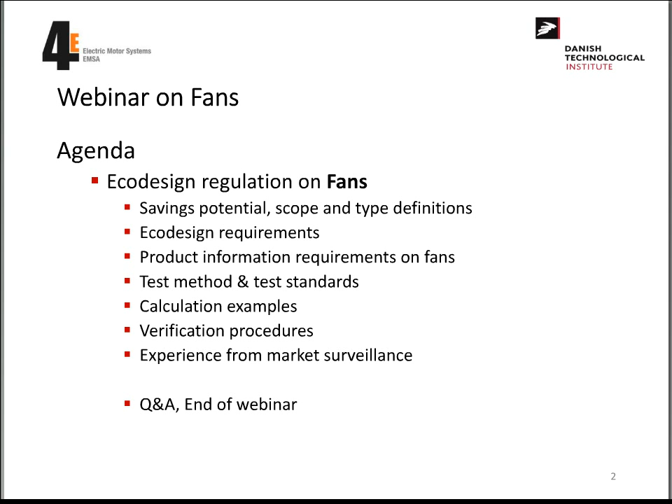First of all, I'll introduce you to the regulation. Some of you might already know a lot, even more than I do, and some of you might need a little update. Afterwards, I'll go through the requirements as they are now and the test method we're using here at DTI. After that, I'll show some calculation examples that could be of big interest for some of you, probably. And in the end, I'll speak shortly about the verification procedures and the market surveillance. And if we have some spare time, I'll show a tool used for optimizing fans and motors that we developed here at DTI.

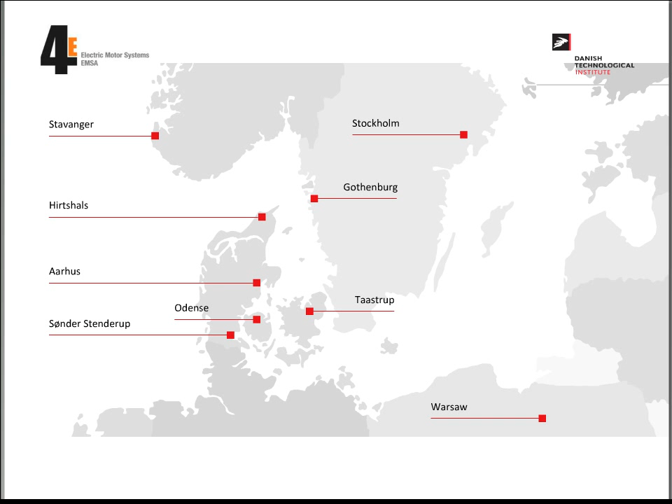As I said before, we are from the Danish Technological Institute. It is a private company, a GTS institute, meaning we are authorized to perform different tests for different authorities. We are around 1,200 employees spread around in Scandinavia, mainly working with research and development activities, and also performance contract activities and commercial projects.

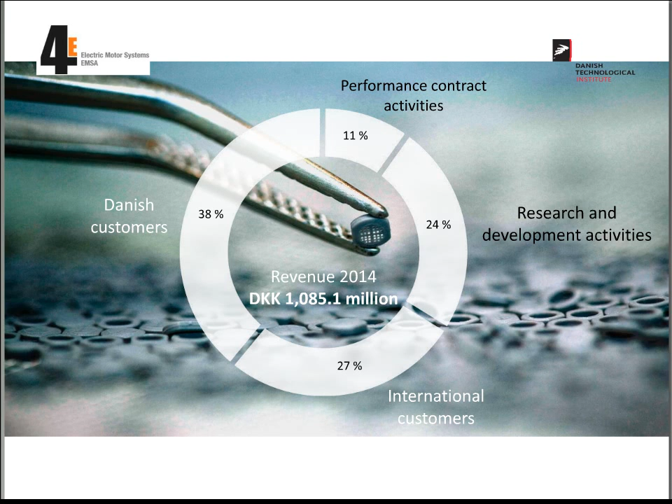Both me and Erik have been working for the European Commission regarding eco-design regulation 327 for fans, but also regarding air handling units. And as I said before, Erik has a few more years on the back, not to say several years.

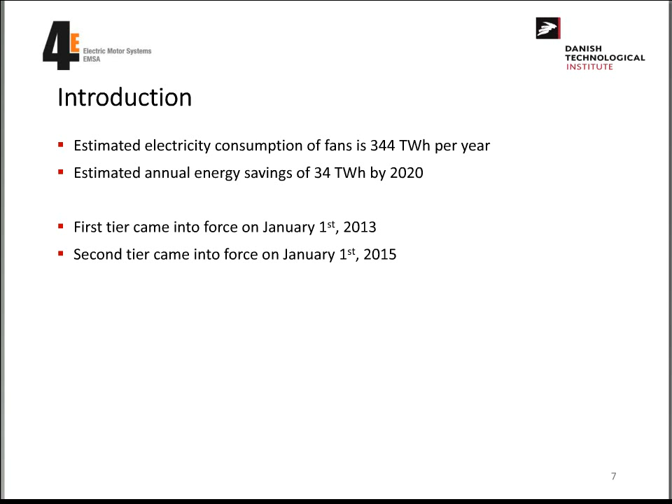I'll mainly be focusing on the second tier. Basically, this regulation includes all fans between 125 watt and 500 kilowatt. The fan has to be equipped or designed to use an electric motor. The regulation does not apply to a lot of fan types used for other purposes. Some of them are shown here, for example, products for emergency use only, laundry and washer dryers with input power below 3 kilowatt, kitchen hoods that are included in another eco-design regulation, and fans with specific operating conditions that could, for example, be in explosive atmospheres or highly toxic environments.

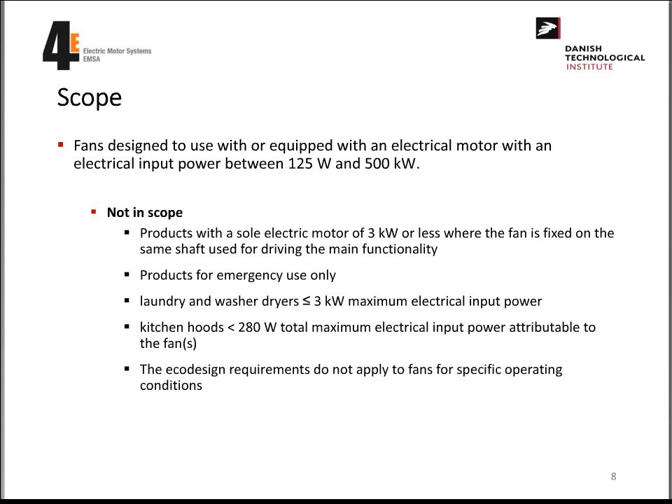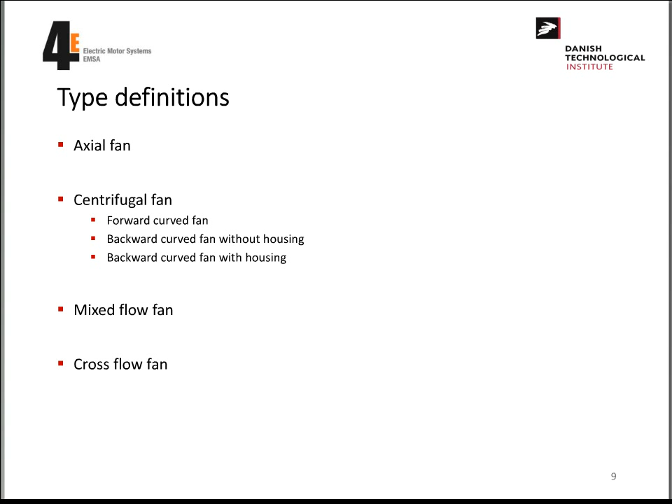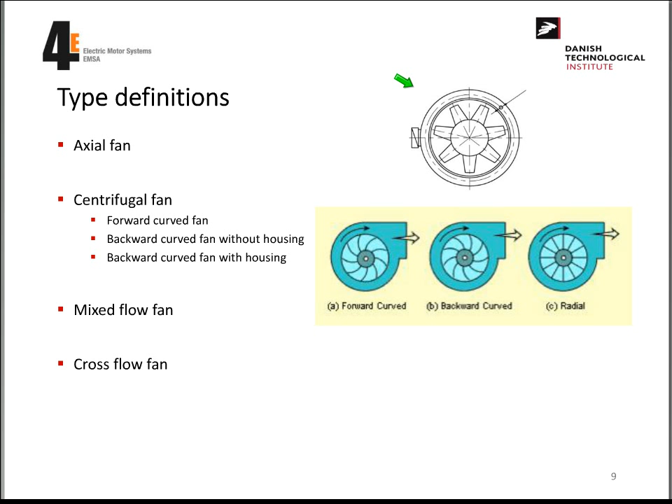The regulation deals with 4 different fan types. The axial fan type is the one shown here. Then there's the centrifugal fan, with 3 different types: the forward curved fan, the backward curved fan with and without housing, and the radial fan. It also includes the mixed flow fan, and the cross flow fan. Okay, I can see we made a mistake, that's also an axial fan. The cross flow fan is usually used in cooling devices. It should have been something else.

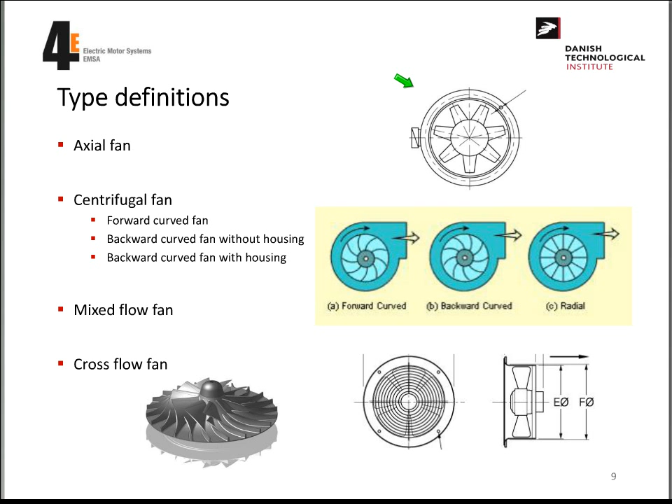This is the eco-design requirements, it will come in a moment. If we take a look a bit closer at this, I'll go through all the parameters shown in the eco-design requirement.

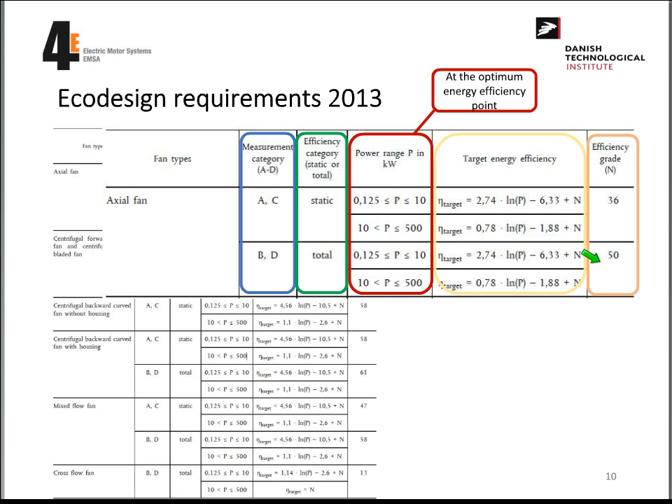And this is for the first tier, 2013. In the second tier, 2015, the efficiency grade changed. So everything else is the same, but the efficiency grade got increased, and I'll show that here. This is from the second year. It's the same as the first year.

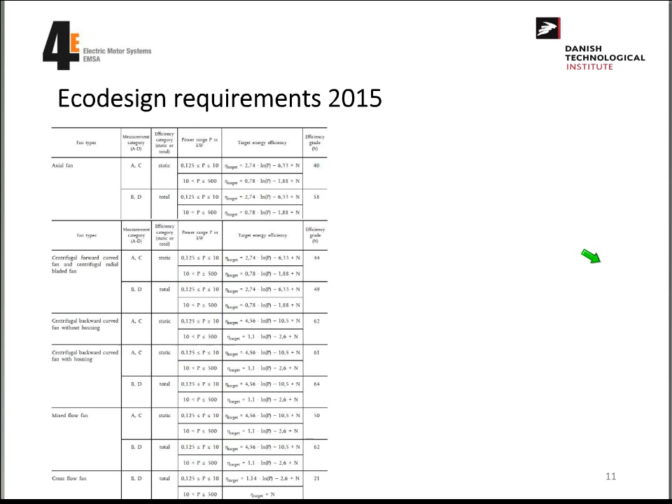If we look a bit closer at the difference between the first tier and the second tier, we can see that, for example, for the axial fan, the efficiency grade increased from 36 to 40. That means 4 percentage points. And that is for the static pressure. If we have a look at the total pressure, we can see it got increased from 50 to 58, meaning 8 percentage points.

And why is this so important? It is important for the manufacturers because they can actually choose whether the fan should be tested according to the static pressure or the total pressure. So if you have a fan that is not performing that well at the total pressure, you could actually change it to the static pressure. It means you'll get reduced requirements.

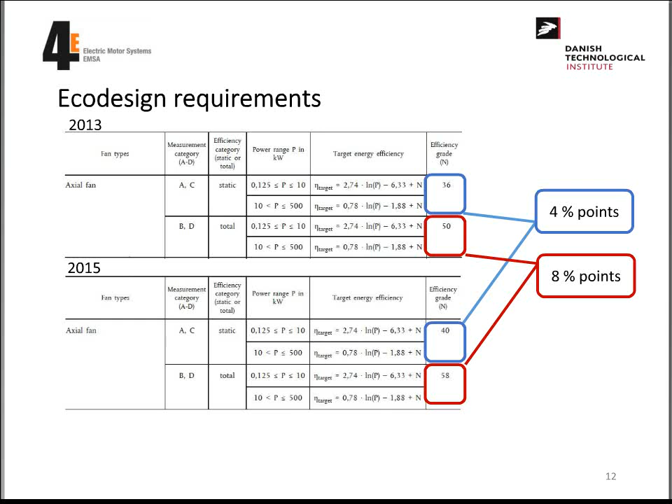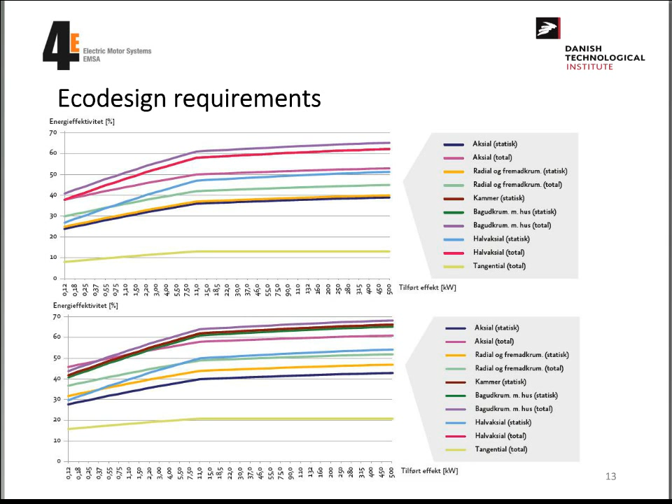The first tier is shown at the top, and the second tier is shown at the bottom. It's more so you have them later on.

It's just important that people have free access to it. This 14-point list, it's not necessary to use the same words, but it has to be shown somewhere.

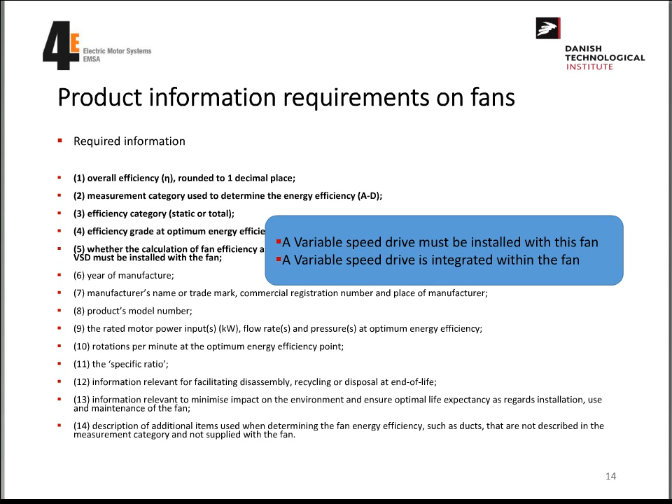If the manufacturers do not fulfill these 14 points, a fan can actually fail during market surveillance because of this. So far, it has not really been done that way. We agreed with the Danish authorities that in the beginning of the first tier, it was okay that the manufacturers didn't fulfill these 14 points - it was only about the efficiency of the fan. But after the second tier came into force, we agreed with the Danish authorities that all these 14 points have to be fulfilled, otherwise it will fail a test.

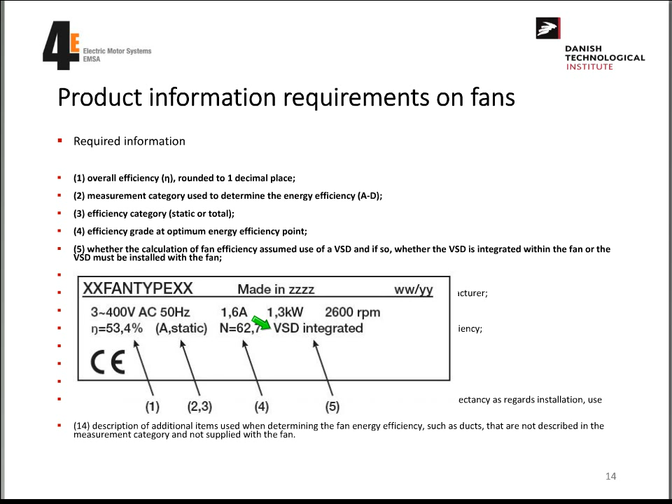Yeah, the test method. The regulation does not really refer to any standards. It's only written that the measurements and calculations must be made using a reliable, accurate, and reproducible method. And here at DTI, we are using the ISO 5801 standard.

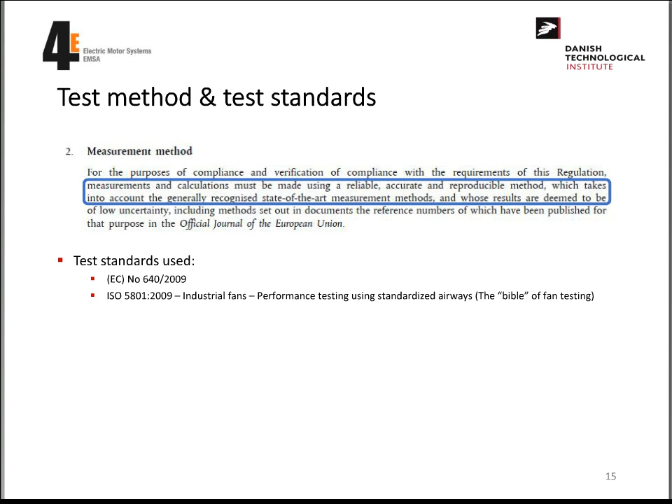If we go a bit closer into how we are testing, the manufacturers have, according to the previously described 14-point list, to provide the rated motor power input, the flow rate, and the pressure at the optimum energy efficiency point. And it's shown by the square and the arrow.

Based on this information, we can plot in the point where the fan has the best efficiency. And to make sure, when we are testing, we are always testing around this point given by the manufacturers, to make sure that we will find the best efficiency point.

Normally, when we are performing a test not according to the regulation, we always make the full curve. It's a bit different in this regulation, where we only have to test in one point. And that can be a problem.

We have also seen that it's a problem sometimes if the manufacturers are giving a point far from what we are testing. Then we will actually not be able to find the optimum energy efficiency point. How we are doing this is that we are changing the pressure, we are changing the flow rate, and

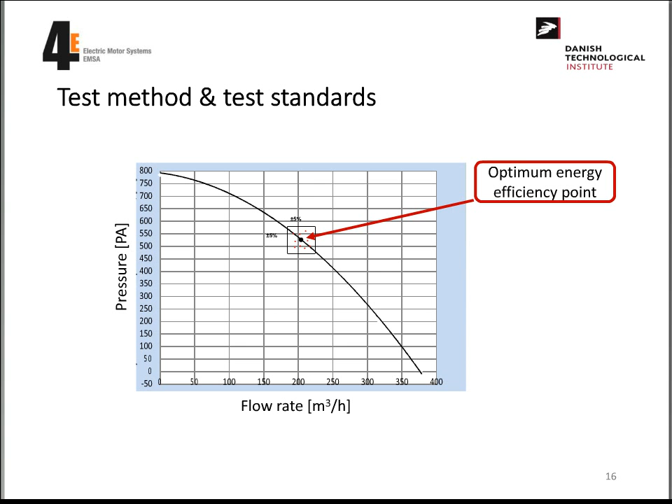hereby we are getting a wave of measurements around the points. The energy efficiency is calculated by this formula shown here. This formula is only used if a variable speed drive is not included. If a variable speed drive is included, we're using another formula where we are adding a part load compensation factor. I'll not go deeper into this because this is something you can definitely read by yourself.

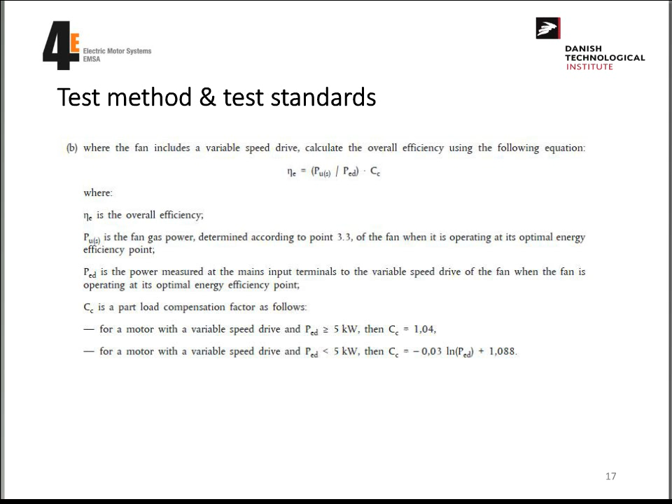What is important is that what we are measuring or what we are writing when measuring. This is an example for a compliance result that passed. I'll just quickly go through.

We measure the efficiency here, based on the efficiency grade that the manufacturer gave us. And the requirement is calculated by the previously shown formula. It's 45.6. And this target efficiency has to be multiplied by a factor 0.9, so it actually gives us a lower requirement for the compliance, and it's shown here, it's the 41. So in this case, the product really performed well and way better than the requirement in the regulation.

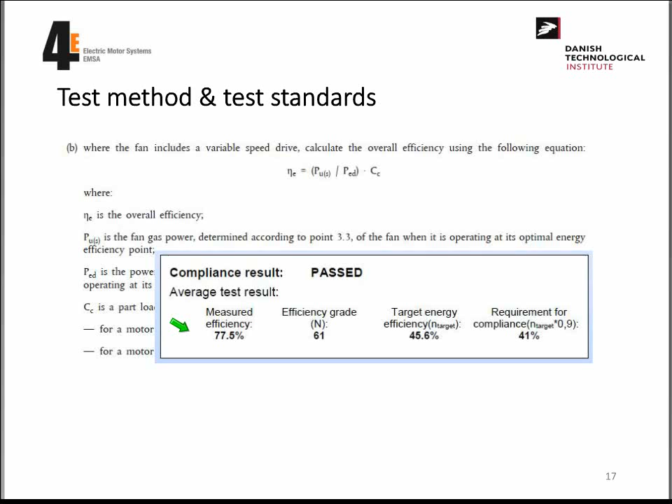The regulation deals with 4 different measurement categories, A, B, C, and D. The A version is a fan with free inlet and outlet. The B is a fan with free inlet and ducted outlet. C is a fan with ducted inlet and free outlet, and D is a fan with duct at the inlet and outlet. I'll show you an example.

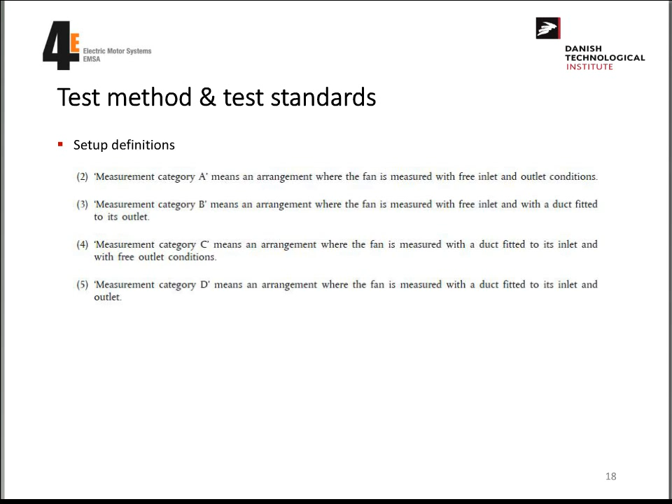This is measurement category A, and the fan is shown by the red square. In this case, because we have to measure the flow, we have to add a box, also called a pressure equalization box, which is attached to one of the sides of the fan. Doesn't matter which one. This box has to fulfill the requirements regarding dimensions, velocity, distributions over the cross-sectional area. Due to these requirements, the pressure inside the box is considered almost as uniform atmospheric pressure. And in this way, we can measure the flow. The box is made according to the standards.

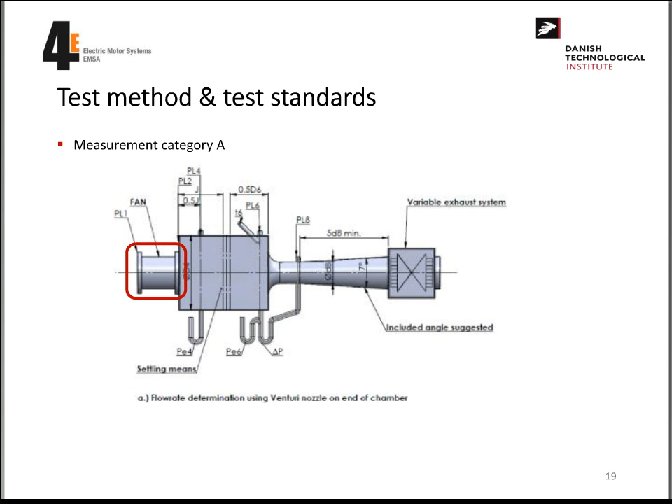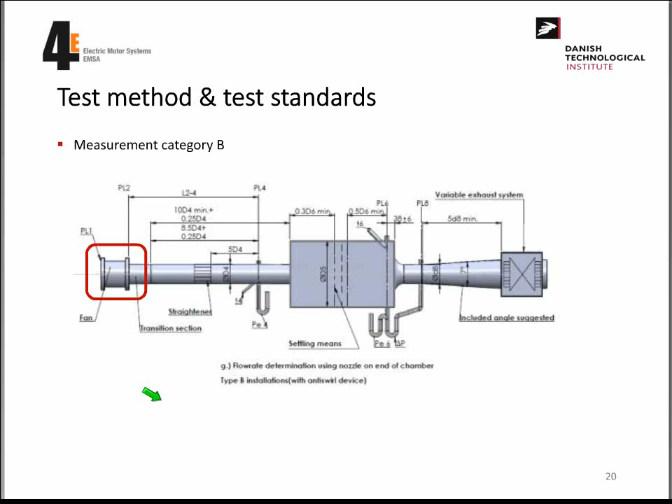Example B, here again you see the fan with a ducted outlet. I'll not go into details for this, it's just so you have an idea what we are talking about with the different categories. This is measurement category C. And this is measurement category D with a ducted inlet and outlet.

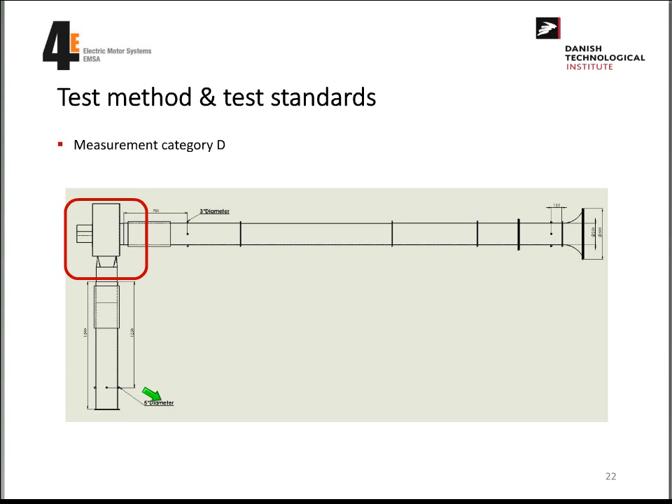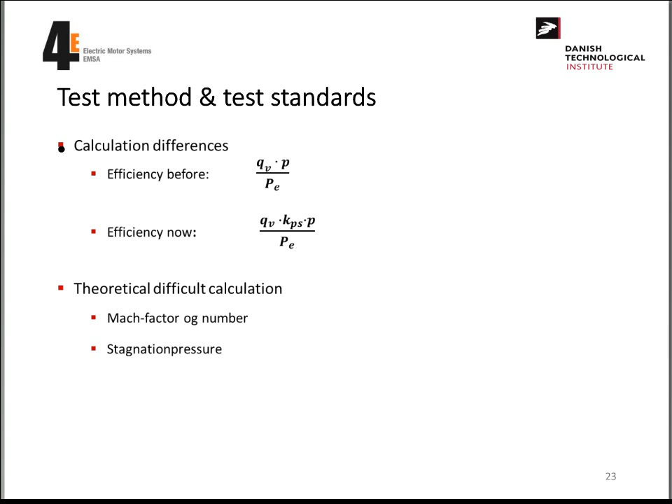Some of the differences between the regulation and the old standards, and some of the significant differences between the old standard and the regulation is that the efficiency is calculated different. Before, the efficiency was calculated by the hydraulic power divided by the input power, as we know.

The new regulation applies a new parameter called the compressibility coefficient. It's shown here. The compressibility coefficient is the ratio between the mechanical work that a fan performs on a gas and the work that would be done on an incompressible fluid at the same mass flow. This compressibility coefficient is also the reason why an additional motor test has to be performed separately.

I'll show you why. The compressibility coefficient is calculated by the compressibility factor, which includes impeller power, shown here. This impeller power, or the mechanical energy, requires an additional test. I'll get into that a bit later as well.

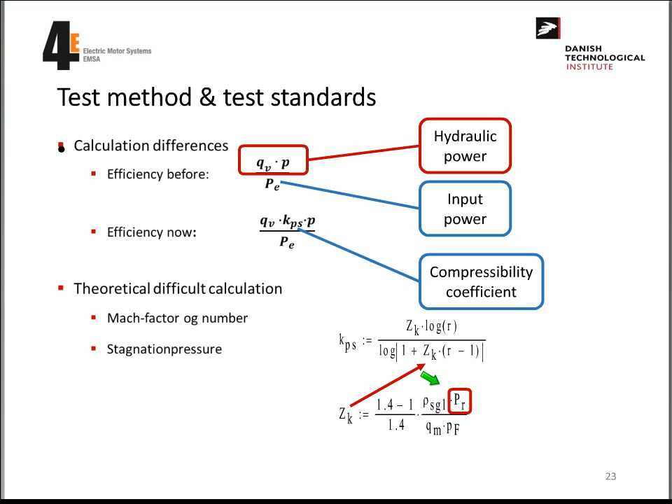I made some calculation examples, a few examples why it's not necessary to make an additional test of the motor. Of course, we're not interested in that because it costs a lot. If we could measure the fan only and not the motor, we could save 1/4 of the price of the fan test.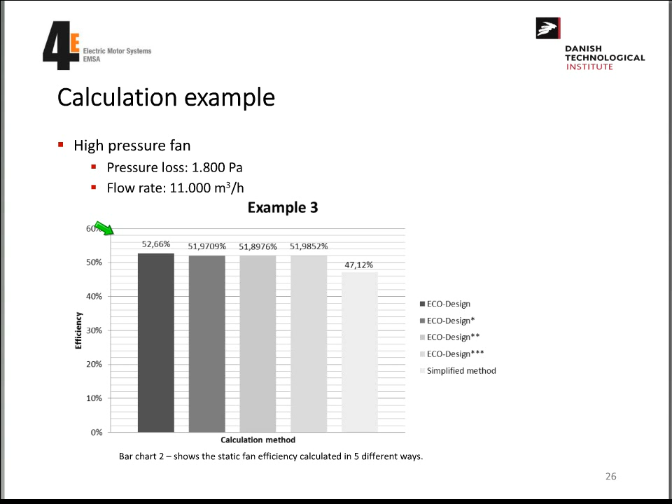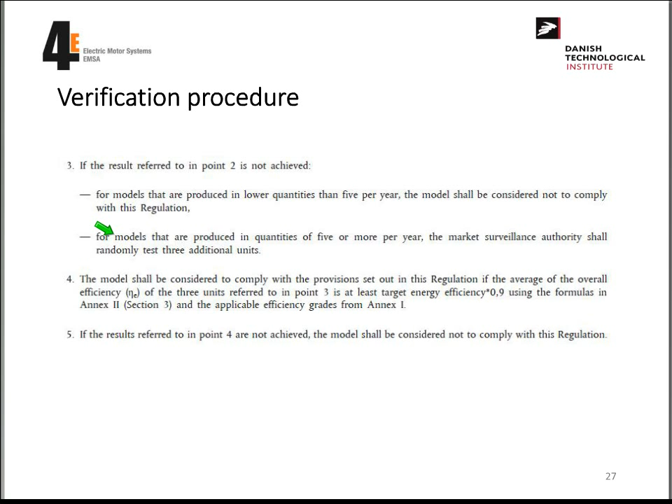A bit about the verification procedure. If a fan is not able to meet the requirements, then we have to test the same fan three times, or randomly test three more units of the same model. If the average efficiency is higher than the end target, then the fan complies with the requirements. If not, then it's failed.

I'll get a bit into that as well. Based on the market surveillance, we have seen that some companies fulfill almost all requirements about the product information, and a lot of the manufacturers do not fulfill them.

In the shown table, we see some of the results we have tested. In the second column, we see the measurement category. Before we can actually test a fan, we need information about which category the manufacturer is testing the fan at. Around a third of the companies didn't provide this information, so we had to choose a category ourselves. This is of course not an appropriate approach, because if we do not get the same results, the company can claim they used another measurement category, and that is not good for anyone.

Regarding the specified performance, you can also see that some manufacturers didn't provide this information. That is not that relevant, because anyway we will measure it, but it gives us an idea where we should end up.

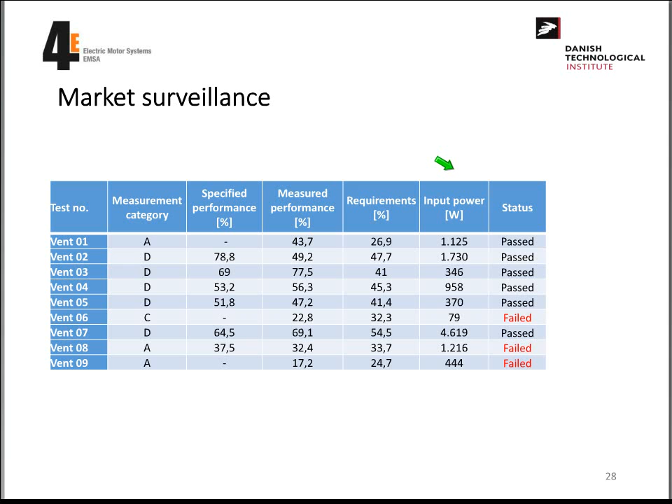In many cases, we have experienced that units delivered to us have been in such bad shape or condition that it wouldn't make sense to test them. In the beginning of the first tier, from 2013, we agreed with the Danish authorities that we should make the companies aware if we saw obstacles or problems with the respective units. That means we talked with the companies and they had a possibility to change or send a new product.

After the second tier came into force, we agreed with the Danish authorities that the units should be tested as received. That means now that if we receive a unit in bad shape, we'll still test it.

If we look at the pictures shown here, you can see that there are some leakages here and here, and this will certainly have an impact on the efficiency of the fan.

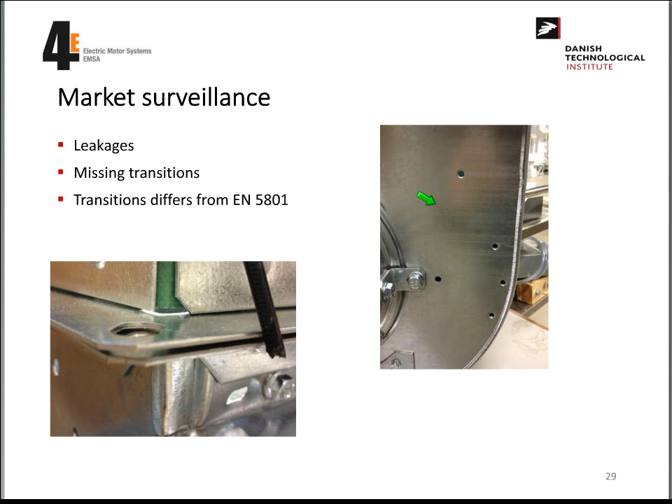Another thing we experienced is that either the unit is not delivered with the right transitions, or in some cases no transitions at all. Just to make sure, the transition is the one shown here. When I say right transitions, I mean a transition made according to the standard. The transition section is preferably formed from a single sheet of material as illustrated in this figure. In some cases it's okay not to use a transition formed according to the standard.

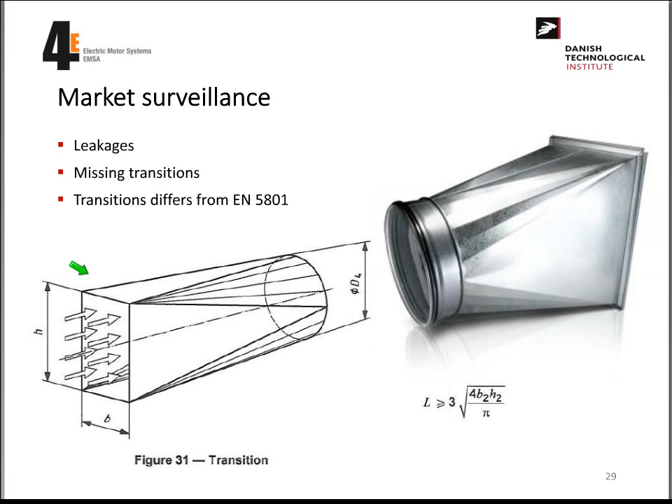If we receive a fan with wrong transitions, we will still test it, and it will definitely reduce the efficiency for the fan.

Based on our experience, we made this description with the Danish energy authorities. Now they will send out this description when they're picking out fans for market surveillance. Then the manufacturers know what they have to deliver and what not to deliver.

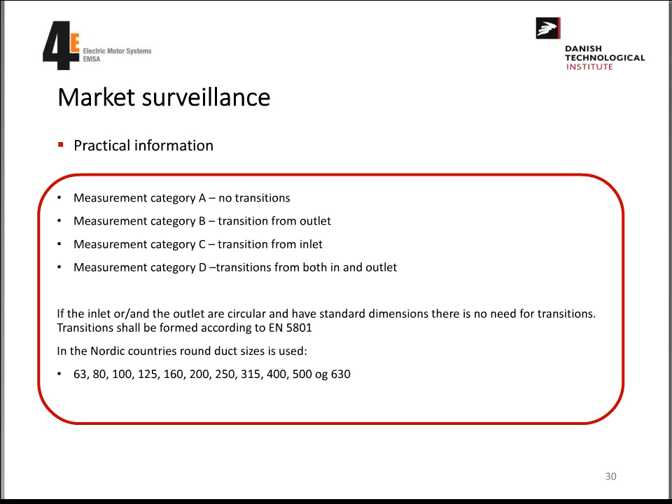That was the presentation, or not the live presentation. I think we have a bit more time, Fernando. Hello, Fernando? Yeah, sorry, I was muted to avoid background noises. Yes, so I think we have some time for a live show. So you can please proceed. Okay.

The MST tool is used for system optimization, and it stands for Motor System Tool. It can be used for several purposes, one of which is to calculate the efficiency of a fan as a function of the part load. It's a tool we developed here at DTI, and you can find more information at this link, where you can also download the program. It's a free program, you only have to register, and I think you'll receive a newsletter as well. Okay, we'll see if I can show you the program.

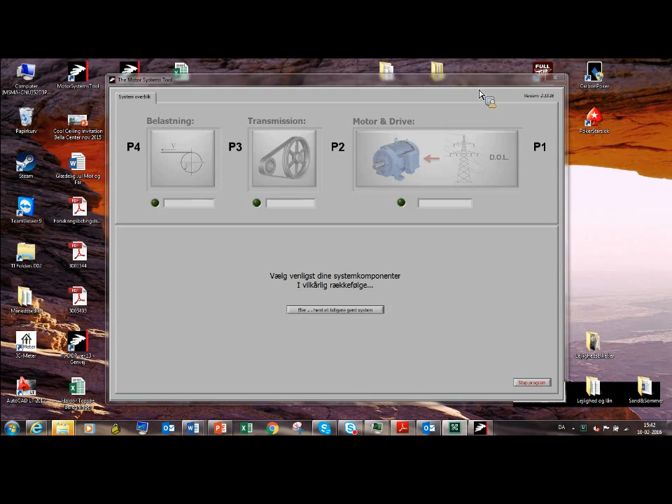Is it possible for you to see my screen now, Fernando? Yes, it works, it works. I can see that it's in Danish. I'll just change it quickly. Wait a moment.

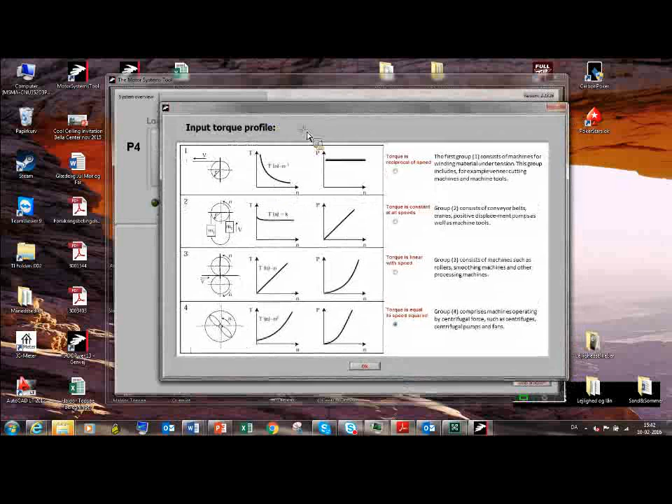First of all, one of the advantages is that the program is easy to use and you can quickly gain a lot of useful information, and you can optimize the system. First, you type in the input parameters. It's the load - here we have a fan, so you choose that one.

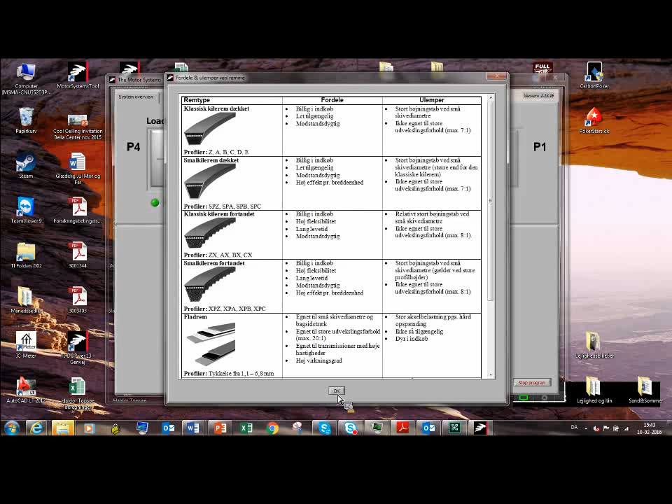Then we type in the transmission. I'll make a quick example: if we say we have a belt transmission, you have a lot of possibilities here for different setups. Down here you have some pros and cons for belts - at the moment it's in Danish, but it will soon be in English as well. And the same here, you have some good advice for belts, also in Danish for now but will be in English soon.

If we change some of the parameters here - I'll just quickly go through this - then we'll type in the motor drive. Here you can type in information about the motor if you have it. If you don't have information, you can load a standard motor. We'll just try one here.

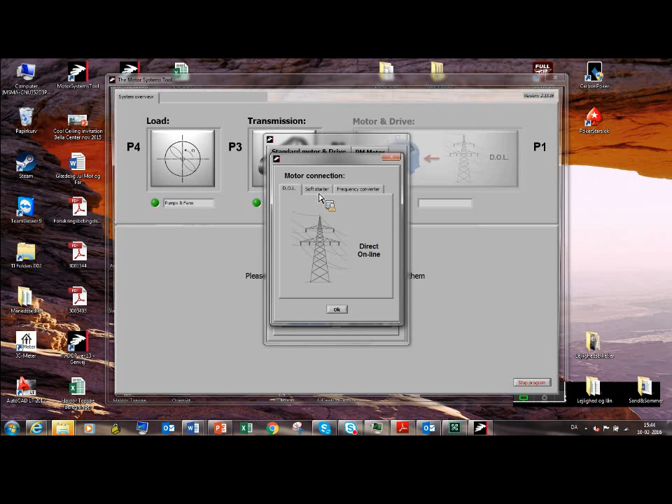You can choose a motor size, the class of the motor, how many poles - we'll just choose this. Motor data over, then you have to choose a motor connection. In this example, we'll just choose a frequency converter, constant.

If we type an example in here, it's something you can play with yourself. I'll just type in some numbers. Yeah, this is the main picture where you can see a lot of different things.

Here at the left, you can see the efficiency of the fan - at the moment this is the one we can regulate. Down here, you decide which one you will regulate after: you can regulate after the fan or the motor - we'll regulate after the fan. So at the moment I have the possibility to type in the efficiency of a fan. It could be 84%.

Based on this information, I can see the information about the motor, the input power, the total input power, and the annual cost as well. The thing about this program is that we can change different parameters, and then we can see the efficiencies and the annual cost.

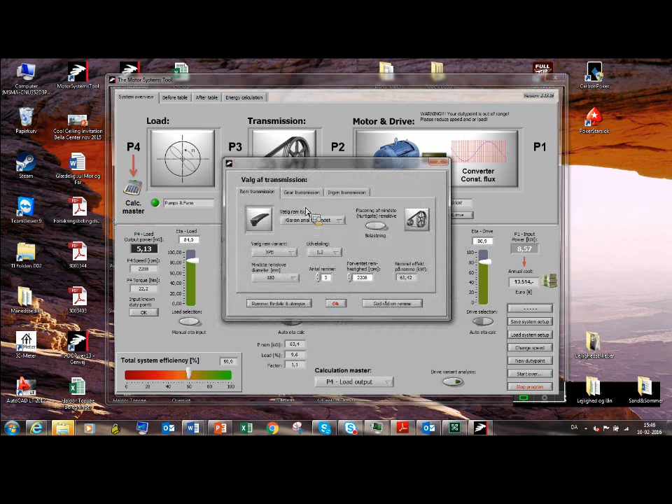For example, if we change the transmission - I don't know what it could be, it could be no transmission - we could do it again. Then we can see the input power changed and the annual cost changed as well. You have different things you can change.

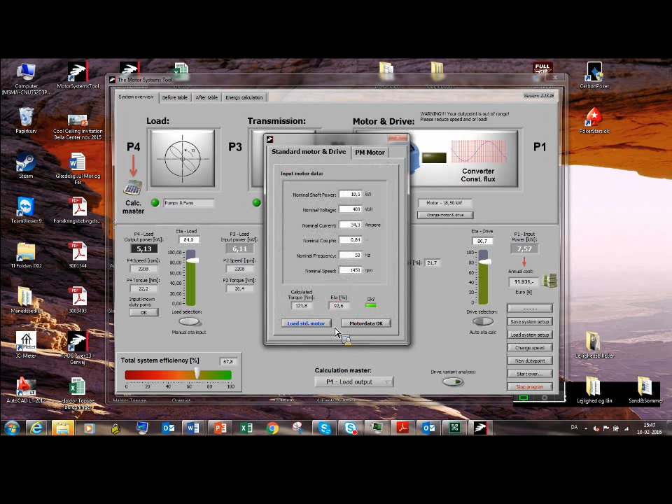You could also change, for example, the motor. If we try to load a standard motor again, we change it to an IE2 or IE3 - that should also change something. It didn't really go that well in this example, but the thing is you have a lot of different possibilities in the program.

If you have known information about the fan, that's what you type in. If you don't have that, but have information about the transmissions, that's what you type in. Or if you have information about the input power, that's what you type in. Then you can sit and change some parameters to see if you can reduce the input power, or increase the efficiencies, and in the end reduce the annual cost.

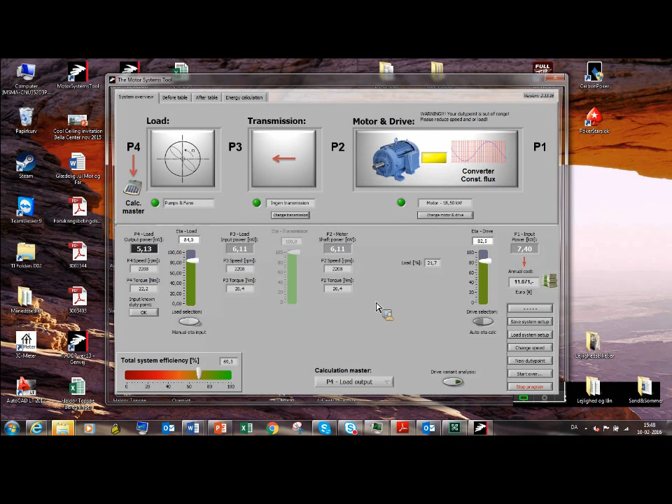I think at the homepage you can find a full presentation of this program, and you'll also be able to find a quick guide for it. So I don't think I'll use more time on this, Fernando.